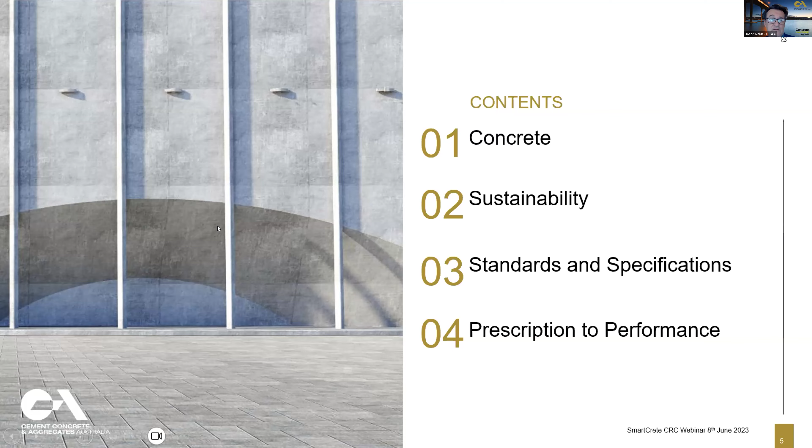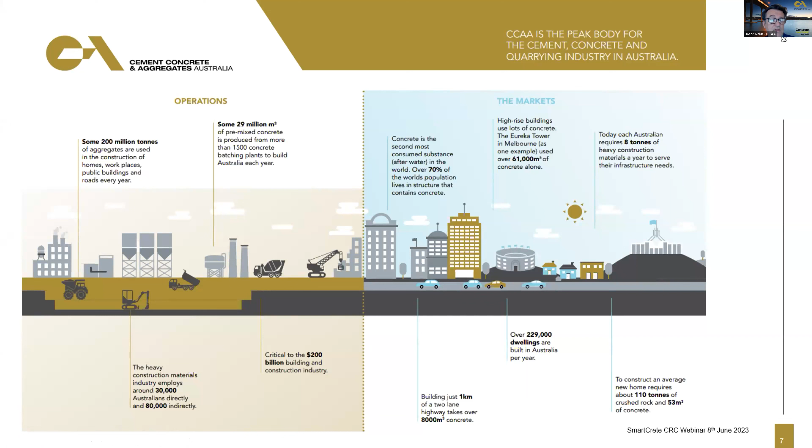All right, concrete - our favourite material. It is the most popular, by volume at least, construction material used in the world. Around 29 million cubes of premix concrete are used in Australia alone, from around 1,500 batch plants. That's about 70 million tonnes of material - 10 million tonnes of cement, 55 million tonnes of aggregates, 3 million tonnes of SCMs, and a little bit of water to mix it all together. As a result, we do use a lot of those materials.

There's a really important focus on sustainability to ensure we're using those resources efficiently and minimising any impacts of extracting and using them. The two areas of interest for us - and I think you'd have to be living under a rock not to hear about - are circular economy and decarbonisation.

From a circular economy point of view, we're fortunate in our industry that while we extract and use a lot of materials, we're not large waste generators. Nearly everything we take out, we use in making concrete, and we're somewhat a net consumer of waste from other industries. For example, we use about 3 million tonnes per year of supplementary cementitious materials from blast furnace waste products or from coal-burning power stations. At a concrete plant, when we wash the concrete trucks out, we capture that water and recycle it for making new concrete. From a quarry point of view, we take quarry fines that would otherwise have no market and transform them into manufactured fine aggregates or manufactured sand to replace natural sands.

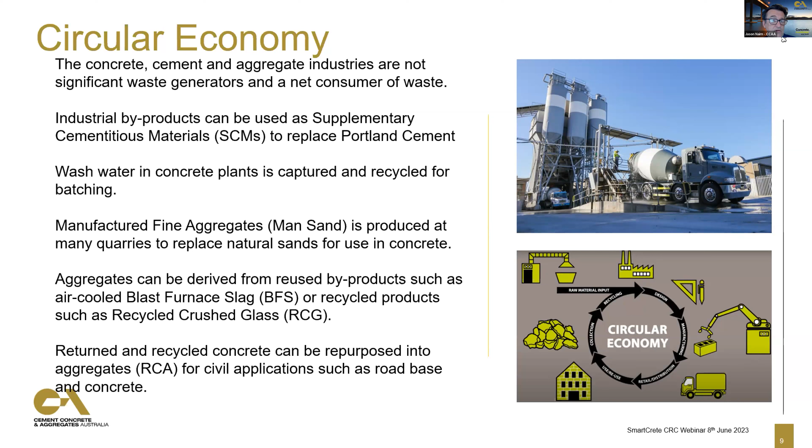We also bring in a lot of aggregates from other industries, such as air-cooled blast furnace slag, and there's a huge growing list of otherwise waste streams, such as recycled crushed glass - where that glass can't be used to make new bottles, which is the real value - to be used as a replacement for natural or manufactured sand. But also, concrete is 100% recyclable. We can reuse concrete at the end of its life to either make new concrete or use it in civil applications. So it's a great opportunity to improve circular economy, and research working with specifications and standards is the way to ensure we're using these materials as best as possible, but with the lowest risk as well.

There's a lot of waste materials that are used, and really they're supported by end-of-waste codes or resource recovery codes in New South Wales, supported by standards, specifications, testing and guides and handbooks. There's been a lot of work going on for a large number of years to encourage the use of waste materials to replace virgin materials, and that continues now.

For example, Austroads have undertaken some work recently around recycled crushed glass. They produced a guide for how to process glass fines to produce RCG, recycled crushed glass, suitable for construction use and a range of applications. And then they've got a specification which tells you the quality requirements for the RCG to be used in different applications. Once you have those things, you know how to make it, you know what you've made, and you've got a guideline of consistency.

These specifications provide consistency. You can then undertake the desktop, lab and field trials to develop and demonstrate the use, and finally make sure those materials are incorporated into our standards and specifications. Again, it's all performance-based. If you've got RCG as an alternative aggregate and a performance-based standard for making concrete, then the thing works really well together.

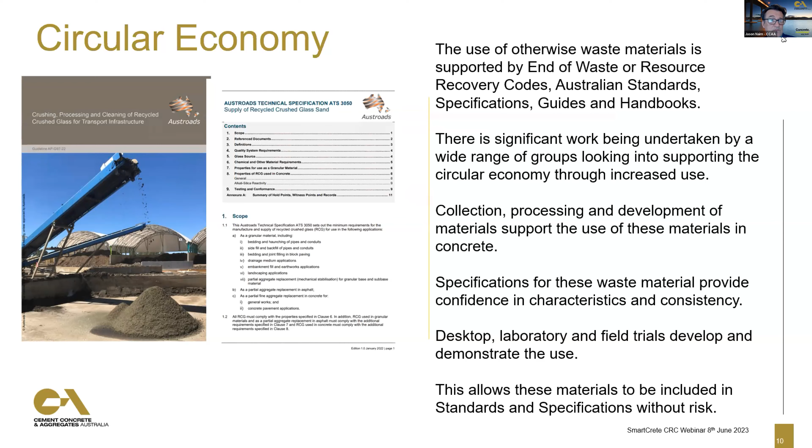The other area of interest for our industry is decarbonisation. People should know that the cement and concrete industry is responsible for a large percentage of anthropogenic CO2 emissions, and we've got a very strong ambition to reduce that CO2 footprint as quickly as possible, with a target of net zero by 2050.

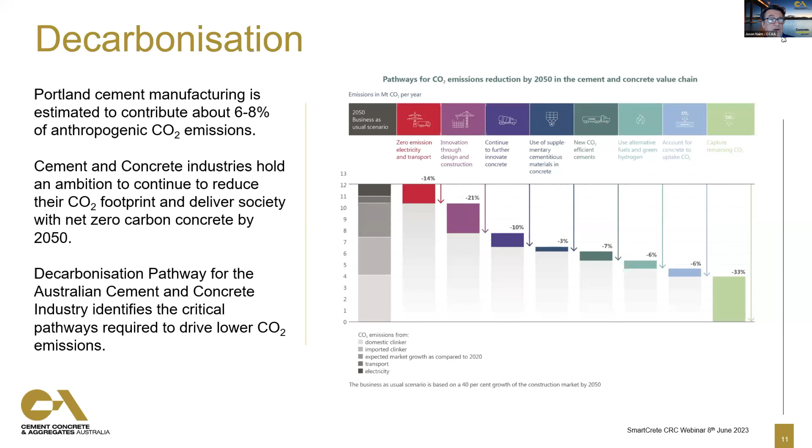As a result, there was a pathways document, decarbonisation pathways for the Australian cement and concrete industry, produced at the end of 2021 in combination with Smartcrete, CIF, ourselves and others. That comes up with 8 pathways, which all work together in parallel to get to net zero by 2050.

From a concrete manufacture, supply and use point of view, there's really only 4 pathways that act in this area. The other ones are about making clinker, electricity use, and carbonation. These four are about the way we design and construct things, the way we make the concrete, and the materials we use, the SCMs and cements inside those concretes.

Together those 4 give about a 41% reduction of CO2 by the 2050 position, but will continuously progress from now to that 41%. When you look at those pathways, there are a lot of individual things happening in design method, structural optimisation, using less materials, and changing the way we assess and test the concrete product, going from 28 days to say 56 days where appropriate.

Changing the construction technologies to use things like going from cast-in-situ to precast, or from pumped concrete to another way of delivering it. Reducing waste is important. Extending the life of the structures is important. Repairing those structures, reusing those structures, and then all the things about the cement.

So you're looking at maximising traditional use of SCMs, but also looking at new ones that are available, looking at reducing cement content, new alternative binders, both non-Portland cement ones and some new CO2-efficient cements. These are the things in those 4 areas, or a shortlist at least, that all rely on changes to specifications and standards to enable them to be delivered.

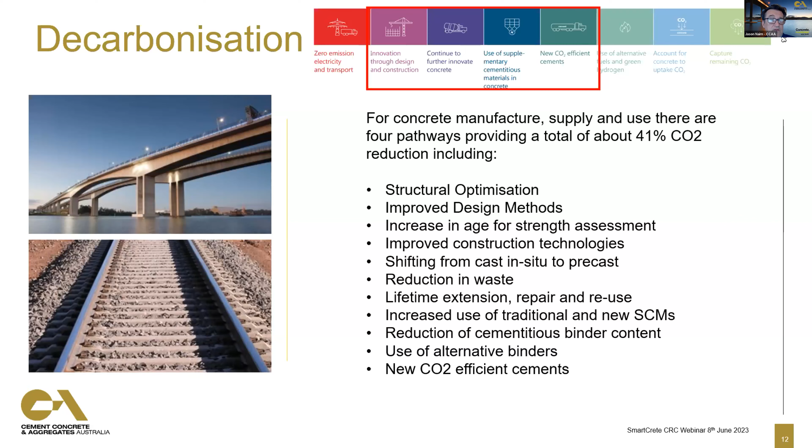Everybody knows concrete is very durable, very strong, very energy efficient, low cost. That's why we use a lot of it. And our structures are typically designed for a long life, 50 to 100 years.

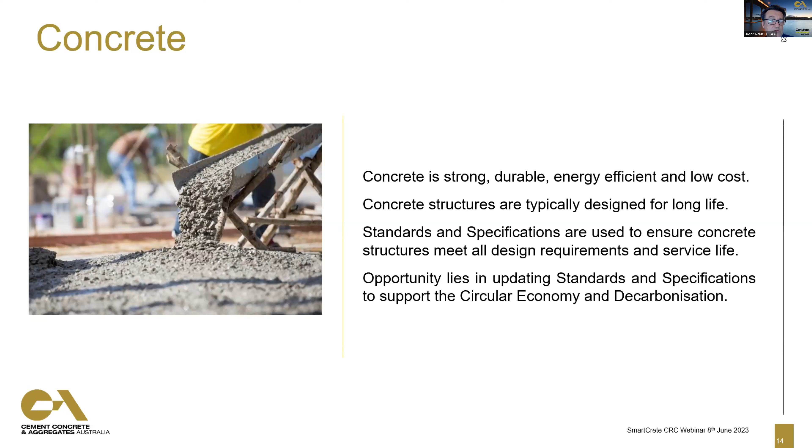But the standards and specifications we have are really important to make sure our design requirements, the structures we make, meet all the in-service requirements and last for this long design life, the long service life. But there are opportunities in the standards and specs to further support the circular economy and support decarbonisation as well.

When we look at standards and specs, from a concrete point of view, these provide requirements for raw materials, about the mix designs, what proportions of these materials you need in those concrete designs, about the concrete properties you want, plastic and hardened properties, the methods of construction, and overlying all of these things is the testing as well.

Standards are also supported by specifications and codes. For instance, the National Construction Code is fully supported by a set of design standards, which is supported by a set of material standards, which is supported by a set of testing standards.

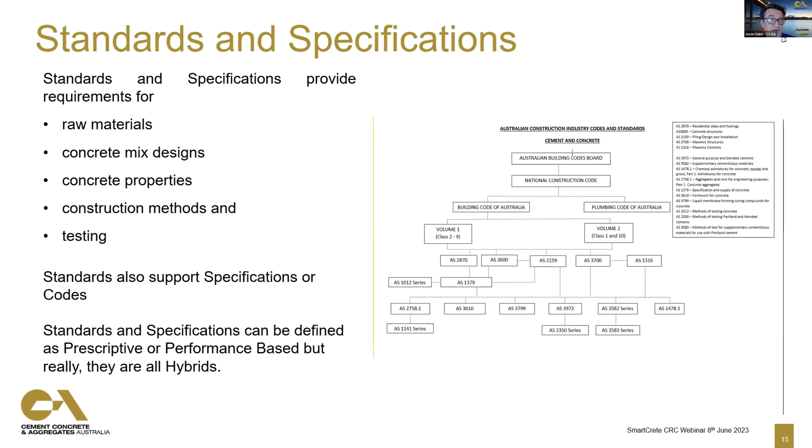Standards and specs can be prescriptive, where they say this is exactly how you can do it, or they can be performance-based, where they say this is what we want at the end, and it's up to you to decide how to deliver that. But in reality, all the standards and specs are somewhat hybrid, so all have a little bit of prescriptive, a little performance, and the balance can change depending on which standard or spec you're talking about.

Prescriptive specifications from a concrete point of view are really intended to deliver the required performance. These are typically based on history, experience and knowledge, and they do limit or specify the types of materials that can be used. So that can be a limitation in regards to looking at new recycled material sources.

They can limit the proportions of the materials that are in the concrete mixes, and that can set minimum cement contents and therefore have an effect on our strategies to decarbonise. They can set plastic properties of the concrete, slump or slump flow ranges, air contents. You can have test methods that are in there, and also the final properties.

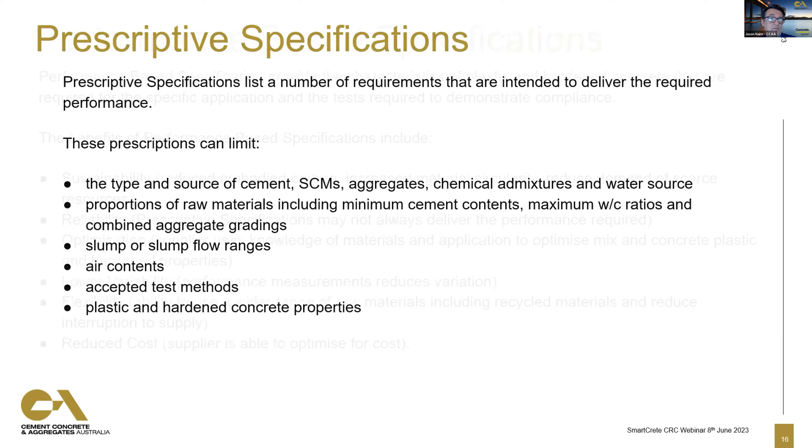Performance-based specifications, on the other hand, really are focused on the important properties of the concrete, both in the plastic and hardened stage, that are required to ensure that the structure being built is going to meet its service and design life requirements. The benefits really are that it can be more sustainable.

You can optimize your mixes to get reduced embodied carbon. You can improve material circularity and reduce the demand of scarce resources. It can be more reliable because it's based on model codes. It can be more optimum in that you can choose what materials you would like to use and optimize those relative amounts of those materials to deliver it. It can have lower variability for the same reasons. It's more flexible, and ideally it has reduced cost as well.

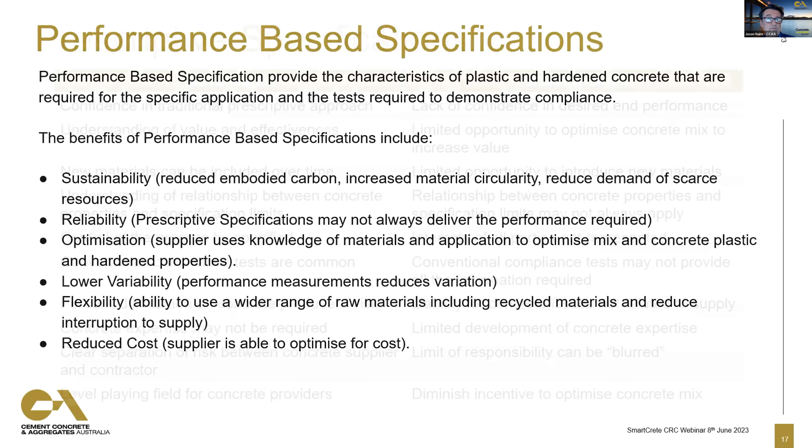But with each of these two distinct types of specifications, there are advantages and disadvantages of both. From a prescriptive specification point of view, the advantages are really about control and confidence. They're simple, they manage risk, and you don't need a lot of expertise to deliver to a prescriptive specification. If a specifier says, I need this much cement in my concrete, you make a concrete with that much cement.

That meets the other test requirements, and that's straightforward. But the disadvantages are that it does diminish the ability to optimize those mixes. It diminishes the ability to include new materials. Doesn't stop it, it just diminishes it, it just slows it down a little bit.

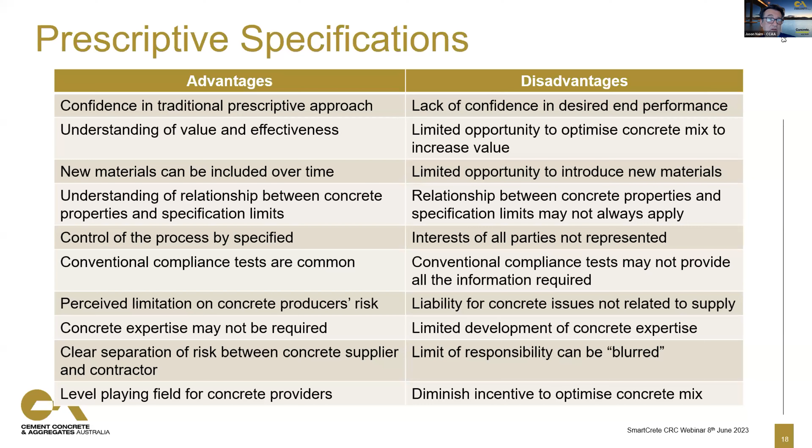As a result, there is a lot of research work and other work that needs to be undertaken collaboratively between the whole value chain to ensure that performance-based specifications are accurate, well supported, and reliable. The tests that we undertake, which are different to the normal tests that we do and aren't very complex, may be more complex, are undertaken accurately and reliably so that you actually have control of that concrete performance via that performance-based specification.

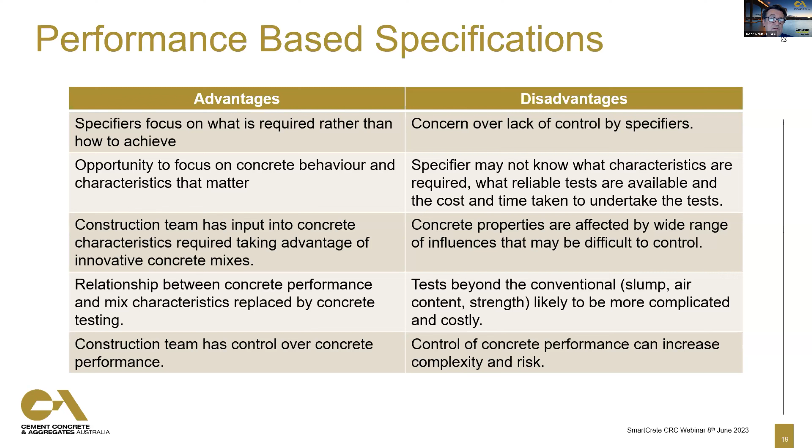But in reality, because there's advantages and disadvantages of both types of specifications, it's hybrid specifications that are the most commonly used. For example, if you look at AS 1379, the manufacture and supply of concrete standard, this one does have some prescriptive requirements. It does say these are the materials you should use to make concrete to meet this standard, but it doesn't specify how much cement, for instance, you need to use to produce a certain concrete grade or certain concrete strength. What it does tell you is how do you sample it, how do you test it, and how do you assess those results to ensure that you're meeting that concrete grade.

But most specifications, though, are a bit more conservative in that regard, and they have additional requirements such as minimum cement contents that's needed for a certain concrete grade, really about controlling durability. But there are lots of specifications as well that are also hybrid. Here's an example from B80 from Transport New South Wales. When we're looking at expansion of aggregates in this AAR reaction, if you measure the aggregate under these AMBT and CPT tests, and you get a certain expansion, then there's some actions required, some deemed to satisfy actions to control that expansion, in particular use of SCMs.

But at the same time, in that specification, under certain conditions, you can use those same tests and work out how much SCM you want to use, fly ash or slag in this case, to reduce those expansions below the level that is acceptable for concrete use. So that's a really good example of a hybrid.

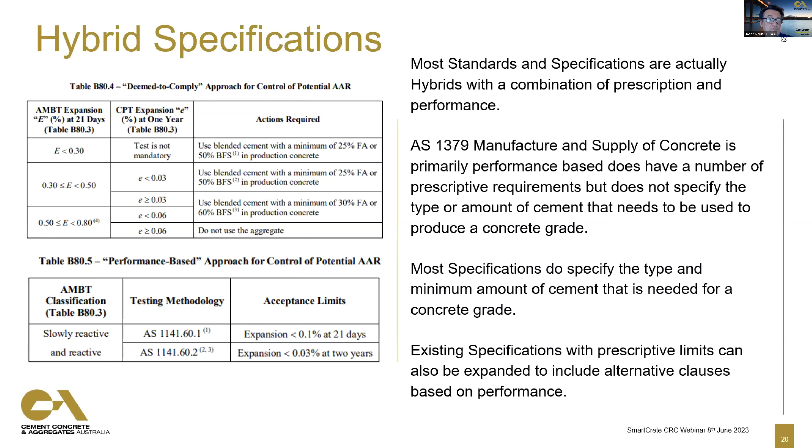I'm sure I clicked that then, hang on.

So how do we go from prescription to performance? Really, it's about adding performance to prescriptive specifications rather than changing from one to the other. From a concrete point of view, there's really a number of key criteria.

It's got to be structurally safe, so we're really interested in the hardened properties of the concrete. It's got to be able to be constructed, so we're interested in the plastic properties of the concrete. It's got to be durable, so we are interested in the durability of that hardened concrete. And it's got to be sustainable.

We do the first two, structural safety and constructability requirements, in specifications and standards right now. We do have some specifications and standards that talk about durability, and we're starting to see circularity index and certainly upfront or embodied carbon come into the requirements for concrete supply as well.

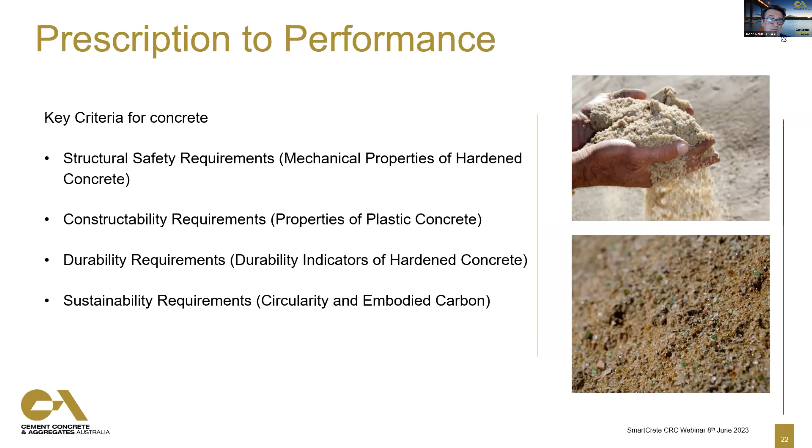From a structural and constructability specification point of view, we have some very simple tests that we do in regards to the hardened concrete, typically strength, which can be used to predict other properties such as stiffness, modulus, flexural strength or shrinkage or otherwise.

It's a very simple test, typically tested at 28 days. There's an opportunity to change that test date to a later date, take advantage of maybe 56 days where it's appropriate, and take advantage of the strength gain we get past 28 days that doesn't occur that much with straight cement mixes, but occurs highly with SCM mixes.

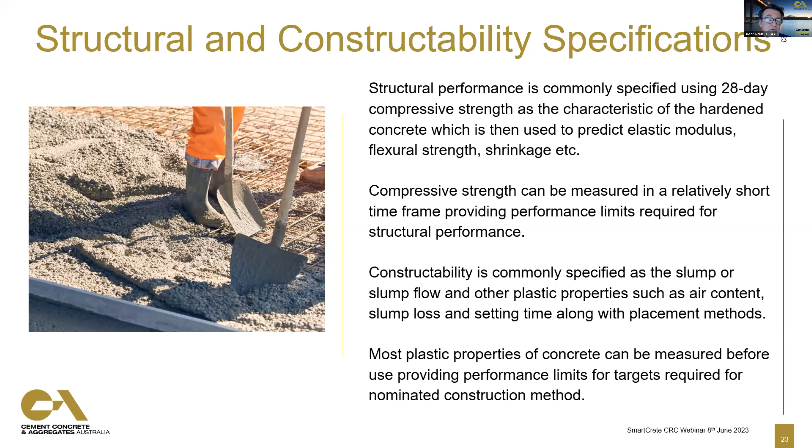Constructability is normally specified by a placement method and then an appropriate slump or slump flow. And again, on a performance basis, what we're looking for there is to make sure the concrete is compacted. So maybe we could have a degree of compaction that's specified there instead of those other requirements.

But really, the big opportunity is in durability. It is in durability that prescriptive specifications are probably more popular. And in durability, we really talk about three ways that we control durability of concrete. We have avoidance - we have rules about don't do this, this, and this, and these mechanisms of concrete degrading won't occur. We then have deemed to satisfy rules like reinforcement cover and minimum concrete strength requirements. And then we move to things like service life models, probabilistic or partial safety factors service life models.

Avoidance and deemed to satisfy are really common in specifications and standards because the service life models do require a more thorough understanding. It's more complex. You need to have a durability indicator test, a service life model you have confidence with, and you need to understand the mathematics to ensure that you get the reliability that you're looking for.

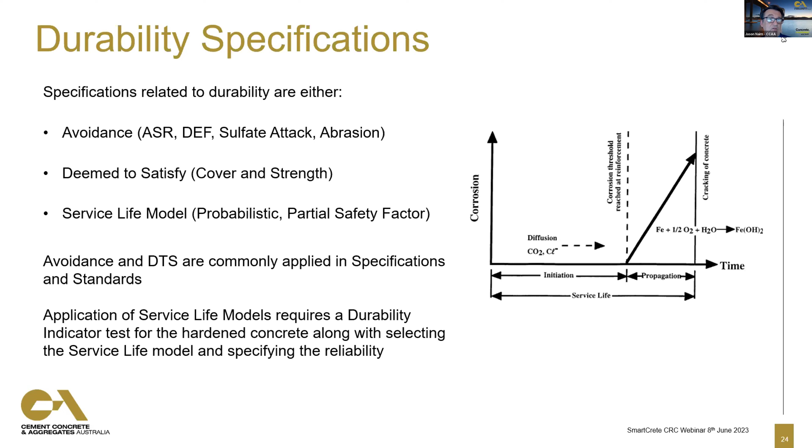But there's plenty of service life models that are published around the world and being used. The FIB have in Bulletin 34 in the model code a good example of that, and that model code is about to be updated this year.

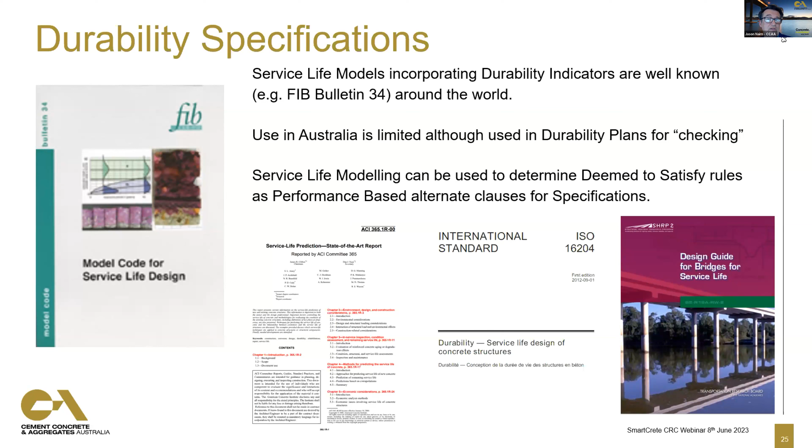We do use service life models in our durability plans for large structures for checking or providing additional advice. And also service life modeling can be used to check things like deemed to satisfy or avoidance rules to make sure those rules work. So they have a lot of value, these service life models.

Key to it, though, really is the test methods, the durability indicators. So from a durability specification point of view, we really need to understand what durability we're talking about. Is it exposed to CO2 and therefore carbonation, or is it exposed to seawater and therefore chlorides? Given that, what sort of accelerated test methods?

We're not going to do a test method - if we're going to have a 100-year design life, we can't wait for 100 years to see if this is going to work. We've got to have methods that are accelerated but still reflect what's really happening in real life, but just gives us the result a little bit quicker, or a lot quicker.

We have to have service life models that we have reliability in, that are mathematically correct and have been proven in real-life environments, and that we've got confidence in the reliability factors we use. We also need to understand whether we're talking about durability specs for quality assurance versus quality control. And then, given all those things, how do we include it into a specification to provide this performance-based alternative?

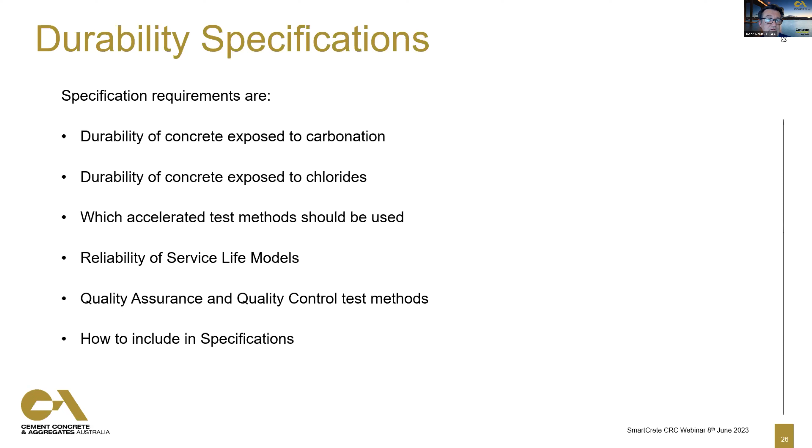These are all areas of thought for research. And finally, what are the opportunities? Well, the opportunity is performance-based construction, supporting circular economy and decarbonisation.

There's a bit of a laundry list of things you can think about: increasing the age of strength assessment from 28 days to 56 days where appropriate, where you're not going to load that structure early. Looking at limits of concrete shrinkage and making sure they're applied where you need those limits, where otherwise the structure will have cracking or shrinkage that's not acceptable.

There's an opportunity to use more recycled materials from different streams, increase the use of traditional SCMs and introduce new SCMs, reduce cement contents where possible, and have the ability to use alternative binders, including new CO2-efficient cements such as LC3s and things like that.

But one of the things that underpins this for durability is that a lot of these things will rely on service life modelling and the determination of the appropriate durability indicators to measure the characteristics of that concrete.

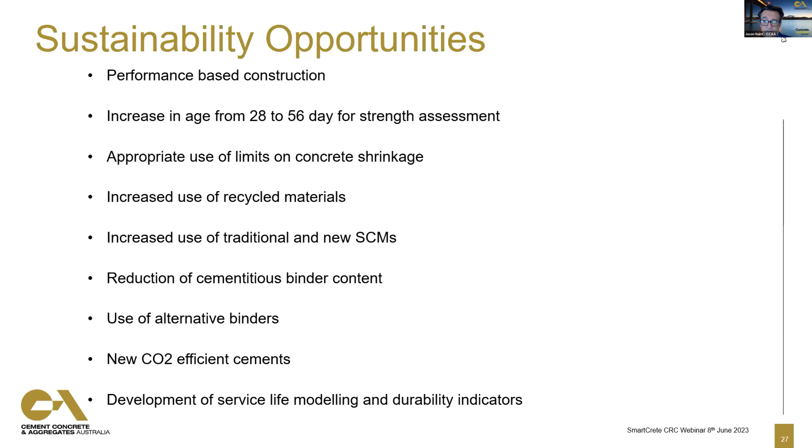Thanks. Back to you, Claire. Oh no, back to Minty. No.

Thank you, Claire. Okay, so yeah, just flick to the second slide. That's fine, there you go. You should have control of that too. Thanks, Bruce. Oh, me, have I got control? No, just flick the second slide, Claire, please. I'll do it, let me just... that one? Okay, okay, thanks very much for the opportunity to come and talk to you.

I'm going to focus for just 5 minutes or so on some of the test methods for assessing the durability of concrete. Jason touched very eloquently on the need for test methods to essentially supplement and support performance-based specifications. But it's not as simple as that, I'm afraid. As you'll see in the next few minutes, some of these test methods do have limitations which really need to be addressed in the performance-based specification.

So the first one: alkali aggregate reactivity. We're all very familiar with this phenomenon, not least of which up here in Queensland, where the infrastructure organisation has suffered hugely from a lot of support structures suffering from expansive reactions. The two test methods available today, AS 1141, 60.1 and 60.2, are designed to allow aggregates to be tested for potential reactivity under alkaline conditions, which is in concrete.

The accelerated mortar bar test is well established, as we all know. It can be carried out by numerous NATA accredited laboratories around the country. But the downside really is that this is an accelerated test. The concrete prism test is also an accelerated test, but it takes a lot longer to run to completion. I put there 2 years, but certainly within the first 18 months or so you'll know whether you're going to be on track for a successful result.

So alkali aggregate reactivity is a durability issue, but it's fairly well established to be able to assess a particular source of aggregate's potential for causing expansive reactions. Next.

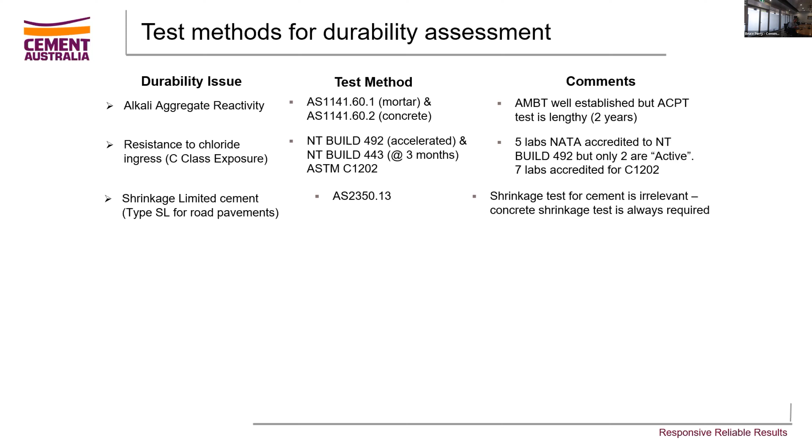This is another accelerated test, primarily aimed at concrete mixes used for pavements, floors, slabs, etc., and also containment structures, water retaining structures, even radiation containment structures. This is an accelerated test well documented in AS 1012 part 13, but the test has a lot of limitations, not least of which is the fact that results you get in the accelerated laboratory test really bear little resemblance to how a concrete element will perform in the field.

Work done here in Queensland by Professor Peter Dux and Allan Carse proved this years ago, that shrinkage numbers in a laboratory test do not correlate to how a concrete floor or element will perform in the environment. So again, when we talk about performance specifications, the test method really has to be relevant to what happens in situ. Okay, moving on.

Another quite topical subject at the moment is the resistance of concrete to carbonation. Why is this a problem? Because there's a school of thought that says concrete mixes with higher levels of supplementary cementitious materials, i.e. low carbon concrete mixes, are more prone to carbonation over a period of time.

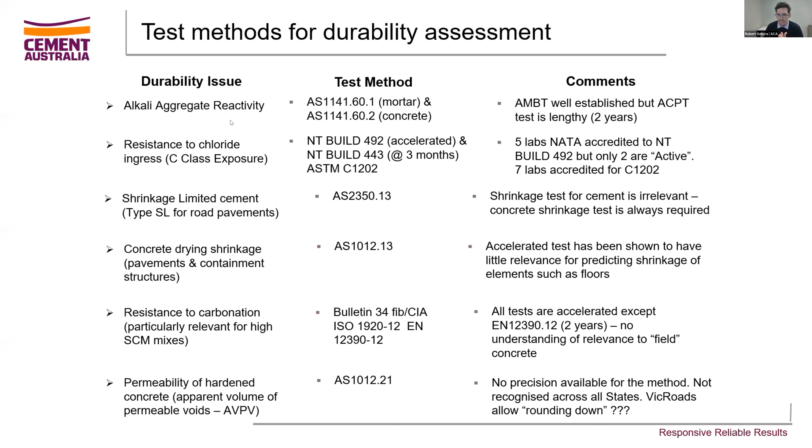Thanks, Claire. Afternoon all. Thanks for the invitation to speak to you today about this. It's a topic—well, the prescriptive specifications part of it, or the performance-based specifications—is a topic very close to our heart at ACA. This won't be a technical conversation. I still struggle with the difference between concrete and cement, so forgive me for that.

Well, let me first introduce ACA. For those of you who don't know us, we represent the largest tier one construction companies in Australia, so all the big infrastructure builders are our members. Our job at ACA is to represent their interests and promote a more sustainable industry in the fullest sense of that word. Now, prescriptive specifications, or specifications in general...

are quite problematic in many respects from a contractor's point of view. It's pretty obvious to all of us that they largely determine what gets built and how things get built. And people often look at the contractors and say things like, well, why aren't you innovating? Why aren't you doing things differently? Why aren't you being more productive?

And the response from a contractor might quite rightly be, well, it's pretty hard to innovate when you're handed a fully resolved design from a consultant, with all due respect, and the client's attached a fixed price lump sum contract to that design, and they've said, go and build that. And that design, of course, is fully resolved to the last nut and bolt. In that sort of framework with very, very prescriptive specifications, it's extremely difficult for a contractor to have any influence on the ultimate design outcome or constructability even.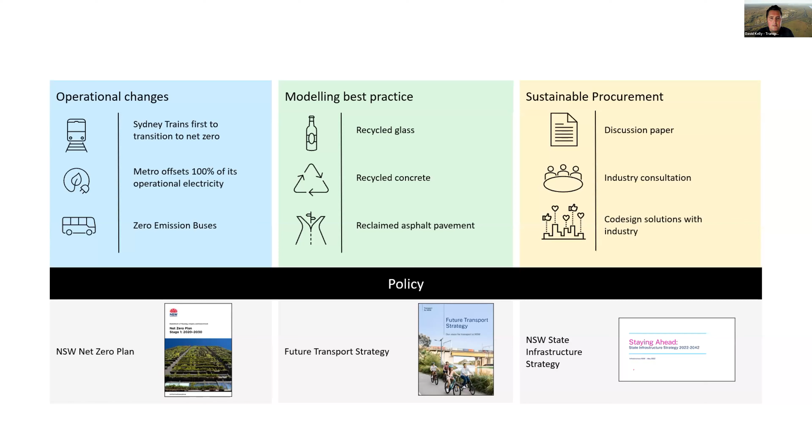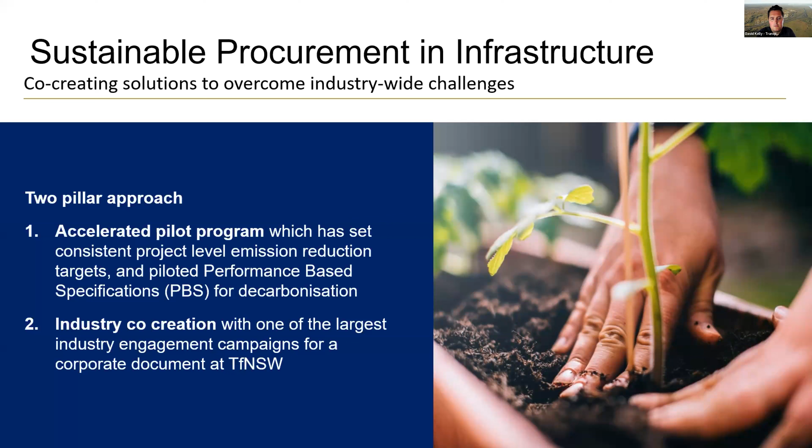Sustainable procurement in infrastructure has been running almost 2 years now. It's a 2-pillar approach: we've got an accelerated pilot program, which set consistent project-level emission reduction targets - M1 to Raymond Terrace behind me being one of those. We've also piloted performance-based specifications for decarbonisation, done in consultation with the Cement, Concrete and Aggregates Association, which was a handy pilot to inform our approach. At the same time, we've got one of the largest industry engagement campaigns for a corporate document at Transport.

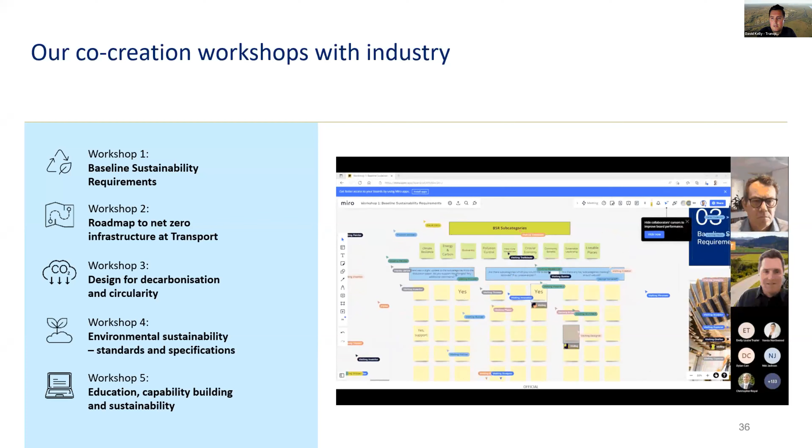Our co-creation workshops brought industry leaders in for 5 targeted sessions. One was on baseline sustainability requirements. The second was our roadmap to net zero infrastructure, plotting discrete milestones out to 2030, 2040 and 2050. Designing for decarbonisation was another - we talk about low carbon materials a lot, but not enough about low carbon assets, and low carbon materials and assets are poorly correlated. We did a whole workshop on standards and specifications as a barrier, and how we're moving to more performance-based specifications, and then one on capability, which was probably one of the biggest challenges.

As mentioned, the report will go out, but there were 4 key themes raised. I'll only focus today on materials and design, and standards and specifications, but I urge you to read the report, and also the associated 2026 Decarbonising Infrastructure Delivery Roadmap with Infrastructure New South Wales.

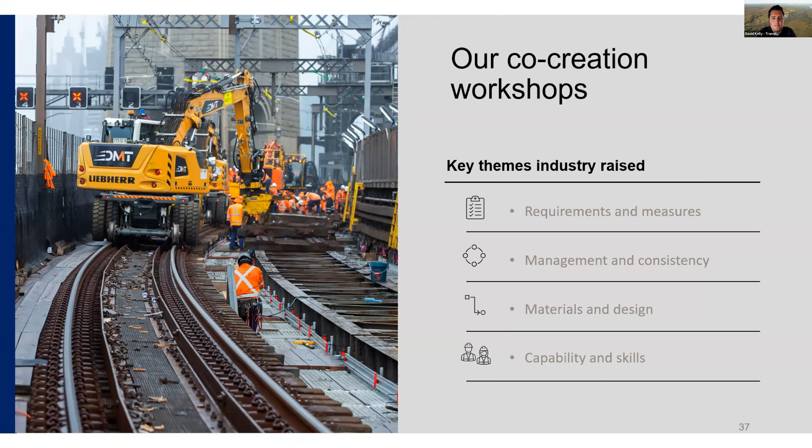So what's the challenge moving to performance-based specifications for decarbonising infrastructure? The first is around carbon management. We've seen leaders such as High Speed 2 at the program level and National Highways at the portfolio level move to certified carbon management systems. The need is to talk about carbon management, not just quantification or assessment. We've got a public commitment after those workshops to move our entire portfolio to a certified carbon management system, set out in the 2026 Decarbonising Infrastructure Delivery Roadmap. We asked Tier 1, 2 and 3 contractors when they'd be ready - our ambitious Tier 1s said 2024, Tier 2 said 2025, and Tier 3 wasn't until 2027. So we've chosen an indicative time of 2026 to have all our contractors and the associated supply chain move to a certified carbon management system, but not before transport gets its own house in order and does that first.

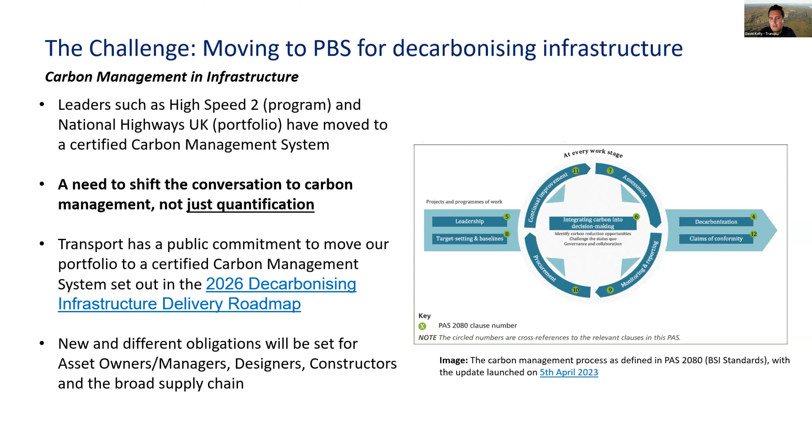PAS 2080 is quite impressive because it sets out requirements for the whole value chain - what are the asset owners and managers doing? Part of the obligations under PAS 2080 is to make sure we're clear and transparent about target setting, baseline, leadership, and how we quantify.

Quantification is just one component of carbon management. Industry should be applauded for taking the lead in utilising digital sustainability tools, but as a result we've got challenges in consistency and assurance to inform robust and transparent whole life carbon - there's virtually a new carbon tool coming on the market every week. Sitting in an asset owner and manager's position, trying to put emission reduction targets on projects, this is really challenging. Under sustainable procurement in infrastructure, particularly our pilots, we're starting to form up what that assured approach looks like. A great case study showing some of the challenges is High Speed 2 Euston Station - they did a side-by-side comparison with two market-leading tools, and just for a C40 and C50 class concrete with 20% ground granulated blast furnace slag, there was a 59% difference in the emissions factors. So huge challenges.

If you can imagine, if we're on a project and we've put an emissions reduction target on without changing any of the design, a contractor could potentially beat that emission reduction target. So it's about working with our industry partners to find this assured approach.

We do have a priority action in that industry engagement report, and that's to create a solution for consistent and assured LCA and carbon footprinting. That will be updated in our digital engineering framework, because the last thing we want to do is stifle innovation, as Robert mentioned. Our Tier 1s are pushing the boundary, they want to be more efficient, and we definitely don't want to stifle that.

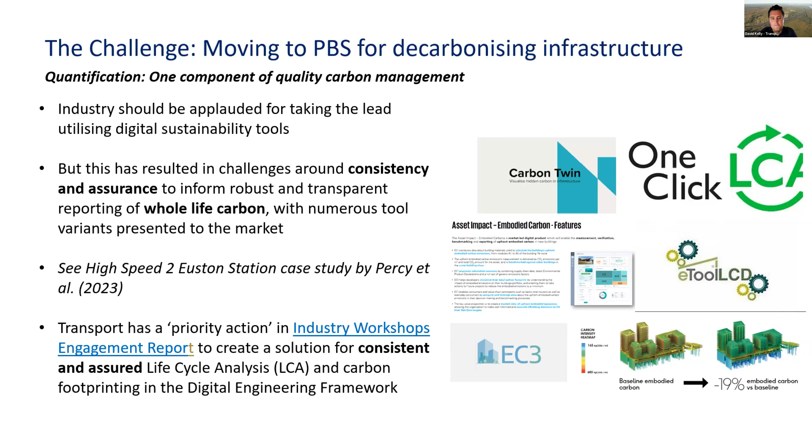Transport's moved to performance-based specification for decarbonising infrastructure. As Jason put it, we're adding more performance to hybrid specifications in most cases. We've launched the 2026 Decarbonising Infrastructure Delivery Roadmap with Infrastructure New South Wales, setting out a clear path for transport and our industry partners to 2026. We're in the process of rolling out that sustainable procurement framework, including minimum emission reduction targets on all of our projects, which is just beginning now on the back of extensive piloting.

We're developing guidance for early market engagement. As Robert mentioned, we need to start thinking about this differently across both our core and complex delivery models, and also how we're designing. Most importantly, continuing to work with our industry partners.

So I'll quickly touch on this, but where does carbon sit? Does it sit with a sustainability professional and we try to bolt it on into all of our standards and specifications? In my opinion, it sits with project performance alongside cost, schedule, risk, and other functions in project performance. So that's the approach we're moving to.

Moving to carbon cost management, we have an international partner that we're doing this with. What we're looking to do is link cost, carbon, and engineering design, and have base carbon built up to PAS 2080. This is going to give that assured approach about what really is a decarbonised solution. We're going to get contractors to produce quantified decarbonisation plans the same way they produce cost plans, using assured lower carbon alternatives. It's a really exciting project and quite progressive in the Australian infrastructure sector.

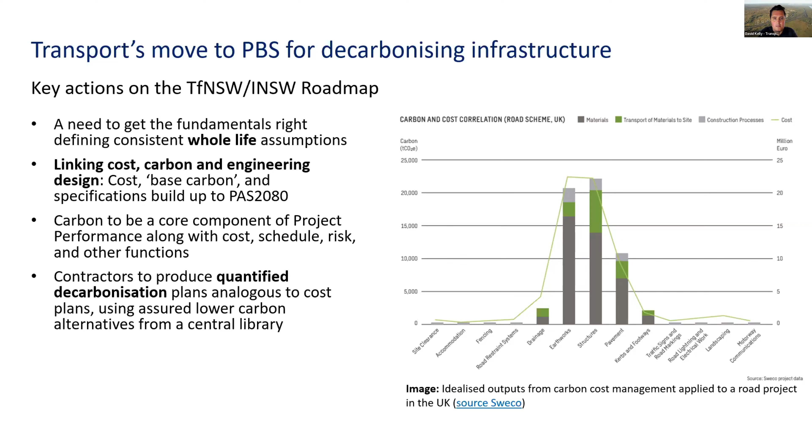So what are the key actions on this roadmap? The first is that we're assigning whole life-based carbon at an item level, so specification level, and then a resource level underneath, as I mentioned with High Speed 2 before, and some of the complexities underneath specifications. Think about core specifications like R53, B80 in the concrete space, R82, R83. We'll also be setting carbon intensity thresholds that form the basis for our performance-based approach to net zero.

I think, Robert, to your point, which is key, is that this will take incentivization, and we've heard that loud and clear through our industry engagement with sustainable procurement and infrastructure. After we deliver that robust and assured whole life carbon management system similar to National Highways, we've got a public commitment to incentivize lower carbon and circularity outcomes on projects. I'm not sure if we're the first infrastructure agency in Australia, but we do have that public commitment there to start to incentivize, to turn the dial.

And that's about it for me. But I think the key here is to continue to work with our industry partners, the Cement Concrete and Aggregates Australia, CCAA, and of course Smartcrete CRC, because there's huge technical challenges here. In my opinion, there's really probably inadequate funding for the amount of accelerated research and development that we need to do to move to that perfect balance between prescriptive and performance — a really nice hybrid approach for standards and specifications.

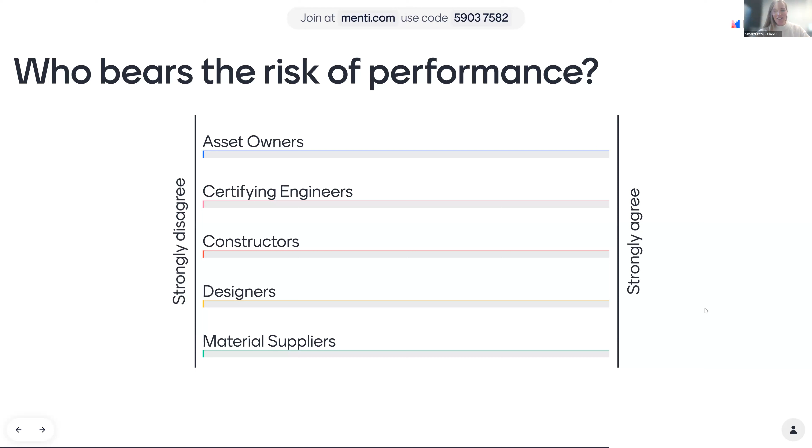We've popped a couple of different supply chain participants there on the list, and you can say that should be from low to high rather than strongly disagree and strongly agree. But low being strongly disagree and high being strongly agree. Who would you say bears the risk of performance?

Fantastic, we're starting to see those little dots jiggle about. Yeah, fascinating.

So I think what we've heard really by listening from everyone across the supply chain today, from the material suppliers through to the constructors through to the asset owners, is really this is a shared responsibility, and it's something we have to work collaboratively to deliver. So that's fabulous insight there.

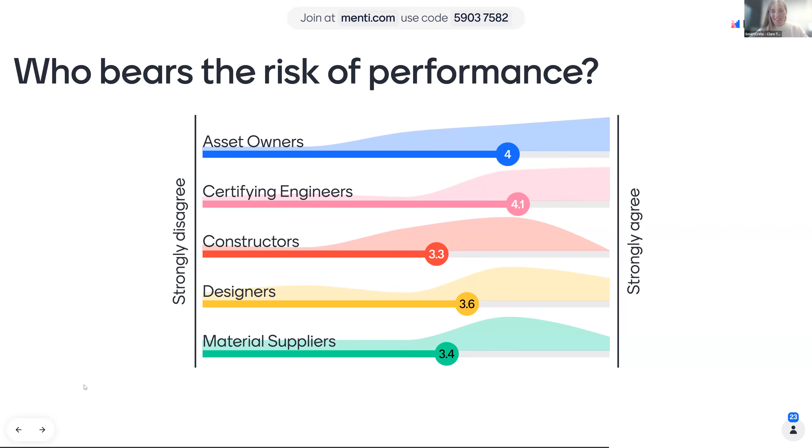Thank you so much. And finally, last question, which I will pop up very quickly. What do you see as the challenges towards adopting performance-based specifications? Again, this is a card exercise, so you can write full sentences in here. What we might do is leave this one running in the background again, so please feel free to pop in anything that you like there, and it will automatically pop into the system.